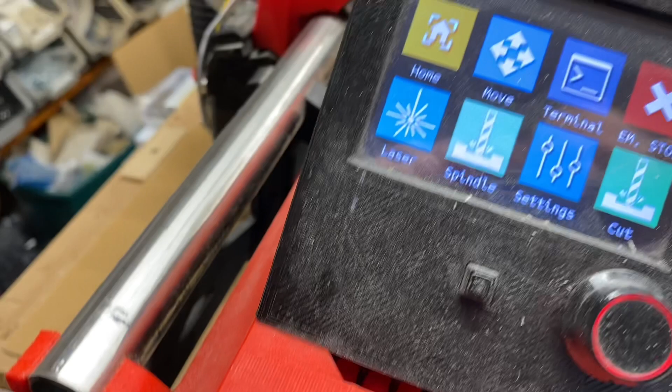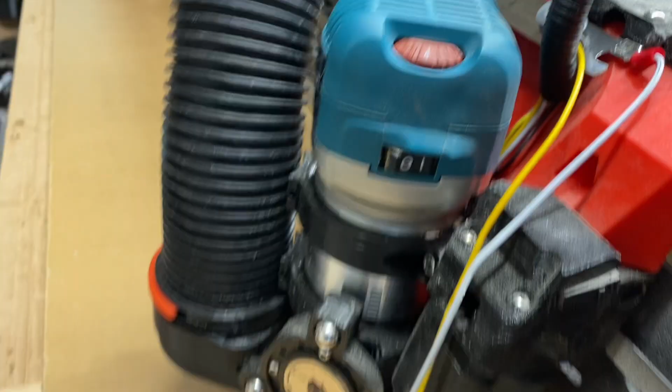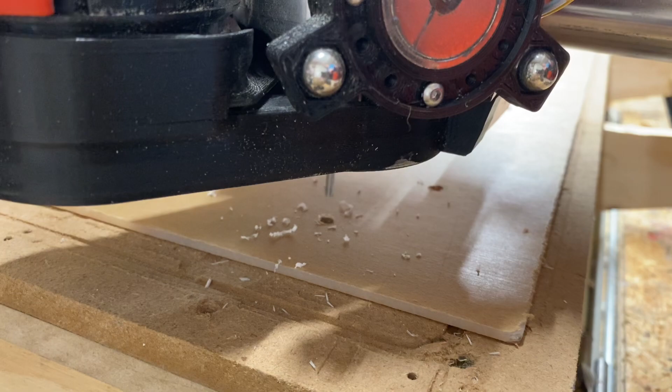I'm a big fan of V1 Engineering and the free open source plans that Ryan makes available for awesome machines, one of which is the mostly printed CNC and also its big brother derivative, the LowRider, currently in its third version. I've built two of the LowRiders, actually I built a version 2, then upgraded it to a version 3, and then built another version 3.

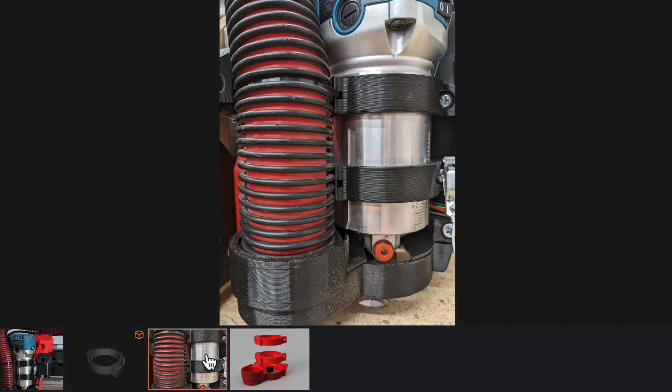Ryan has an excellent design combo for the LowRider version 3 that is a router mount for the Makita 700 series router plus a dust shoe. That dust shoe works great for dust collection, except when your LowRider is riding high above the material where the gap is too great for successful dust collection.

And since cutting and pocketing deeply on thick materials requires a longer bit, and that cut usually has to start with the tip of that longer bit barely into the material, it means that for at least part of the cut job, the LowRider is going to be riding high, and at that point it's going to be spreading sawdust or chips. It's been a desire of LowRider makers to have a way for the dust shoe to stay close to the material for the whole job.

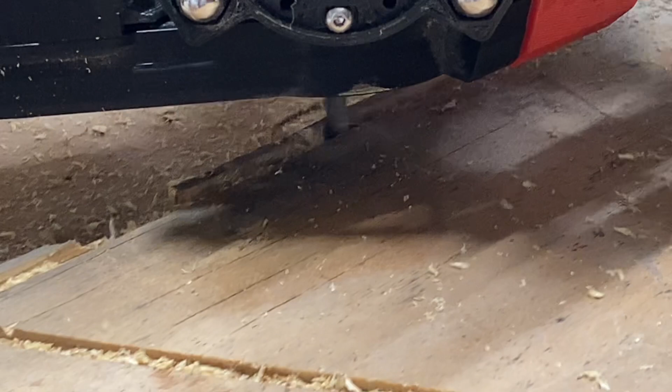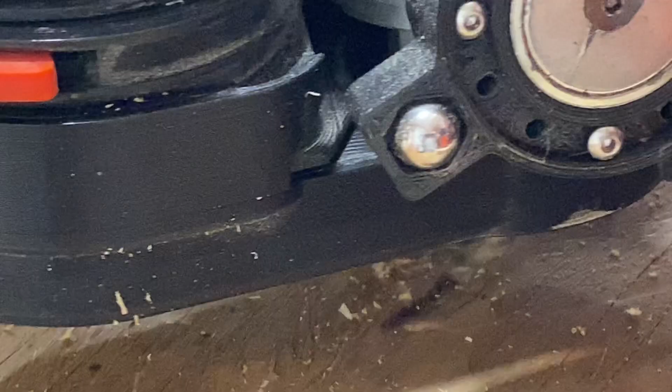Now, part of the strength of the LowRider design is that the closer it gets to the material, the more rigid and stronger the CNC machine is. This is the exact opposite of how most CNCs work. And it's one reason why it's been worth it to put up with any issues in dust collection, because of that added rigidity as you get closer to the material.

But this is accomplished by having the whole X gantry rise and fall in the Z-axis on a LowRider, not just the router itself or the core rising and descending, but the whole X gantry. And so most dust shoe approaches of the CNC world are non-starters. Most CNC designs have a gantry that doesn't travel up and down in the Z-axis. And so this has been discussed at length on the V1 Engineering Forum.

One workaround has been to remix and print slide-on shoes, dust shoes that have higher height. They're thicker, they get closer down to the material, and then pause the job and swap out the tall dust shoe for a shorter one as the core moves down closer to get deeper into the cuts. This means that every time you want to swap a taller dust shoe for a shorter one, you have to temporarily pause the job, turn off the router, then swap the dust shoe, then turn the router back on, then start the job again. So it's doable, it's not real convenient, and so it's less than ideal.

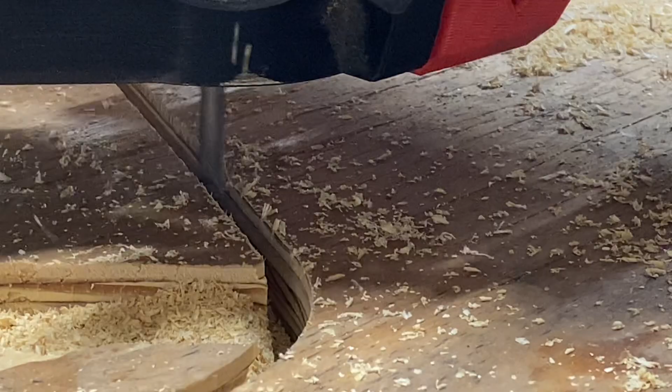So there are at least two basic approaches to tackling this. One is to create a secondary gantry that's attached to the LowRider's YZ plates on either side, and this secondary gantry does not rise in the Z-axis. And then attach to that secondary gantry a height adjustable dust collection system, which can be set and stay at the same Z height for the whole job.

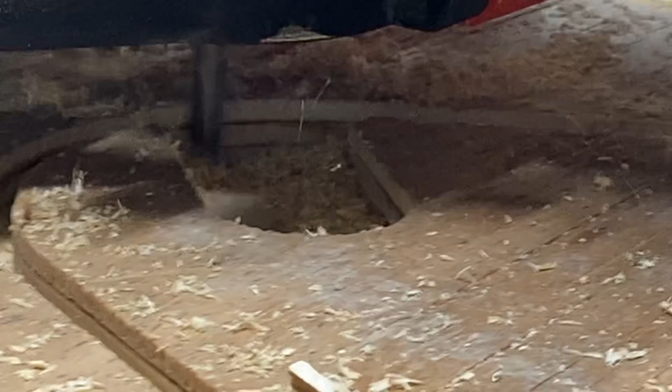There's an engineering challenge here in that this dust collection rig needs to stay in sync with the LowRider core in the X-axis as it moves back and forth, but not in the Z-axis as the core and the gantry itself move up and down. Now, there's an ongoing effort of that approach by Chris, who goes by Fodder1 on the V1 Engineering Forum. His effort is currently underway, and he's kind of tackling one direction while I'm tackling the other.

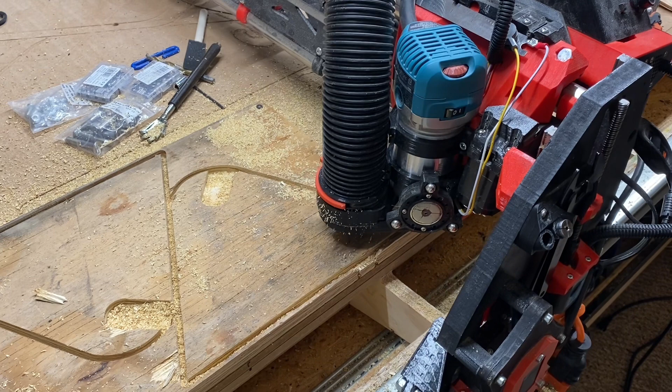The other option is to create a floating Z approach that attaches to the existing LowRider 3 core, and it can adjust on the fly as needed to stay close to the material. The basic idea here is that you would unleash it from some type of a restraint or latch system, and when you're ready to start the job and you've already got everything zeroed in, you would unlatch it and let it drop down onto the top of the material.

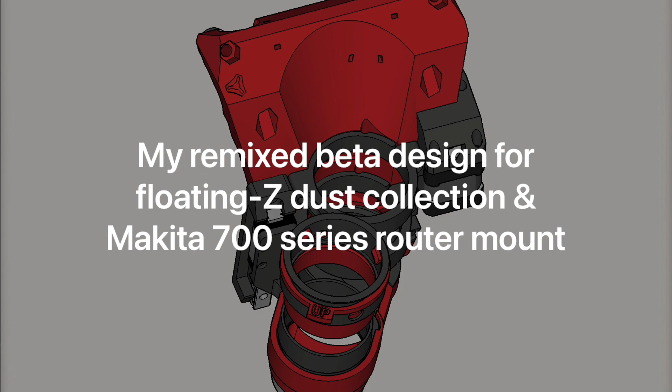It would have brush bristles of some type. My first effort is going to try with bristles made of EVA craft foam. And if that doesn't work out, then I'll switch to some printed TPU brush bristles.

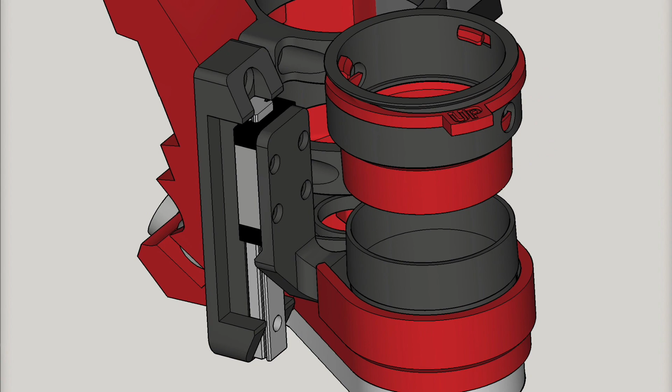But in my efforts to tackle this other approach, I have made a beta test version of my design available on my printables.com account, and I'll put a link in the description for that. This is definitely a work in progress as of the posting of this video.

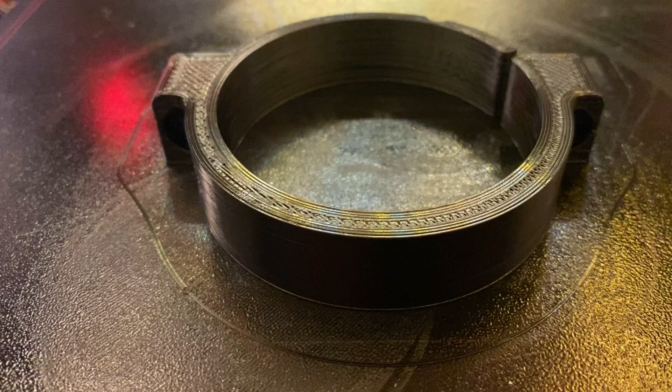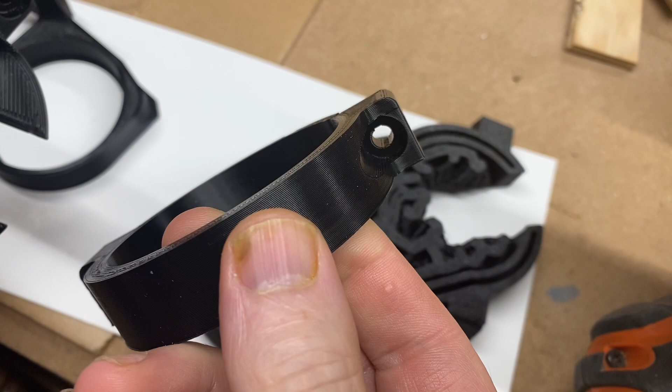Currently, I've printed all the parts. I'm using PLA for printing all of those parts. And I'm already in possession of some craft foam. It comes in 12-inch by 18-inch sheets, about 2.3 or 2.4 millimeters thick. And I used my CO2 laser to cut out bristles out of that craft foam, and so far they're working really good.

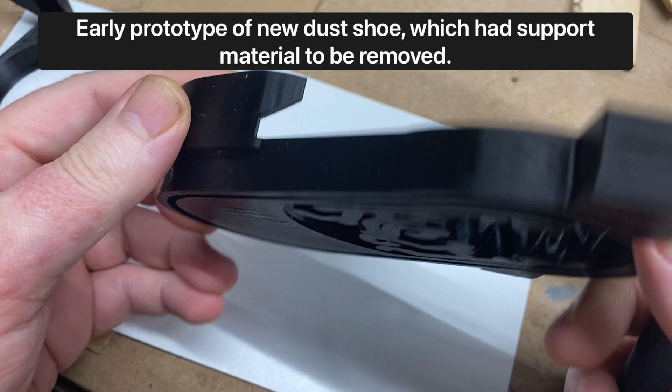I'm also waiting on the arrival of a couple of recently ordered items that I'll need: some 2.5-inch flex hose, I'm only going to need 115 millimeters of that for this project, and some 2.5-inch key hose clamps.

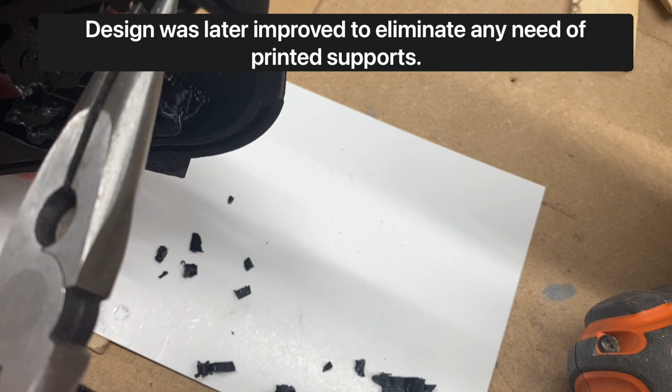I'll need 2 of them to attach that 115 millimeter flex hose between the upper part of this floating Z system and the lower part that moves up and down. The concept here is actually the reverse of that. The flex hose will go at the bottom to the dust collection system that is kind of sledding or skating on the material and not changing its Z height.

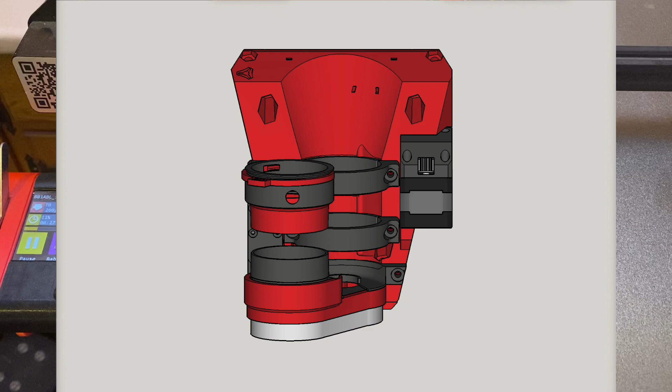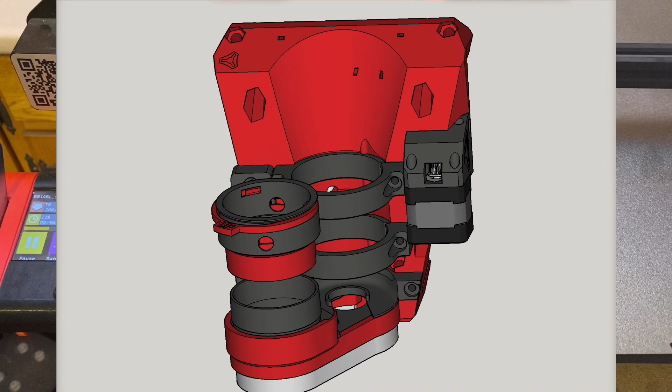The top of that bit of flex hose will be attached to the LowRider core, and as the LowRider core lowers or rises, the flex hose would be able to compress or expand as needed to keep the suction across that changing distance. So if you are a V1 engineering maker, a fellow LowRider maker, and you'd like to help test this approach, and you don't mind being a little adventurous and having a potential possible loss of a little bit of wasted PLA, please feel free to print this out and assemble it and try it out.

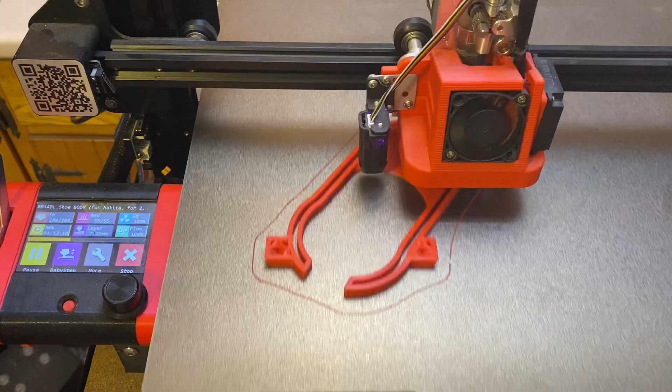Regarding the bristles, there are at least 3 ways to accomplish this. One is the EVA craft foam. I mentioned the printed TPU bristles. And lastly is buying an actual dust shoe brush. You can buy these on Amazon and other places. I've bought some of that, but it's too thick to fit into the groove on the bottom of my dust shoe here, so I'm not going to go with that approach. There's also the possibility of cutting the bristles loose from the brush strip that's too thick and then epoxy gluing loose bristles into the groove. I'm also not interested in doing that kind of approach.

I've already done the laser cutting, and it really came out wonderfully, cutting the craft foam to get the bristles. So if you have some craft foam on hand and it's a large enough sheet and you've got a laser cutter, you're set. You could also just cut a 24 millimeter strip and cut it to the proper length, which I think is somewhere around 317 millimeters to 322 millimeters in length. You can then insert that. My thought is to glue that strip of craft foam in, possibly with some rubber cement, and then you could just use scissors to snip your slits into it to produce your separate bristles.

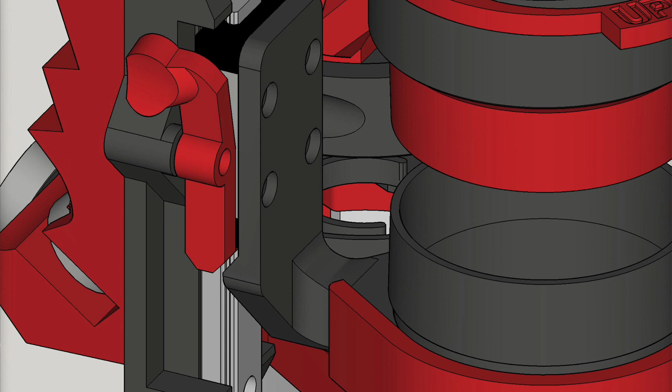The possibility of having to keep up with that separate printed bar with the magnets in it, and the possibility of losing it, caused me to explore other options. One that I came up with, and I don't know if it's going to work, is to have a slide latch. So I worked up a design with an alternate B version, a B option, the linear rail mount that has a little protrusion on the side where a hinge pin can go. My plan is to use an M5 bolt for that hinge pin. Then I designed a latch, and the latch would be spring loaded, using the spring taken from a common writing pen. Again, the illustrations for this make it clear if you want to try that.

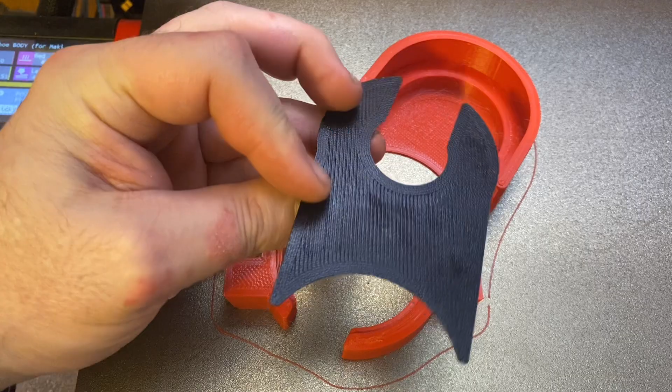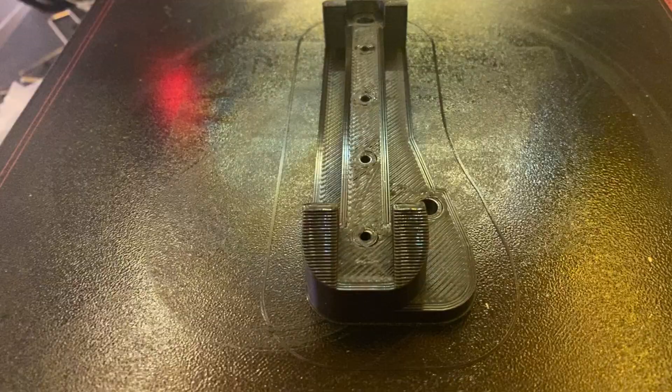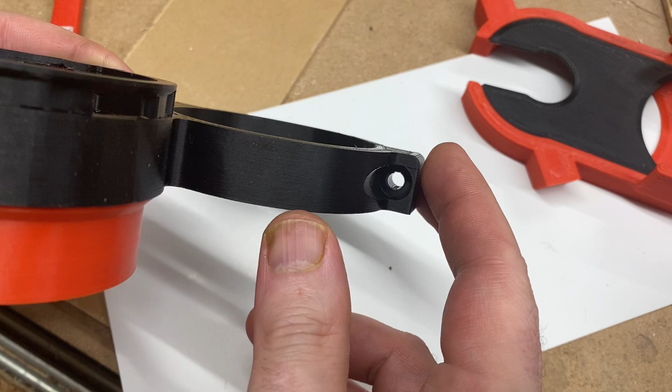I wanted to mention a question that came up on the V1 Engineering Forum: if we succeed with a dust shoe that stays close to the material and has bristles constricting the airflow so suction can pull sawdust and chips out, do we want to change how much constriction there is on the bottom of the dust shoe? Not being fluent in fluid dynamics, I'm not sure which way will be best.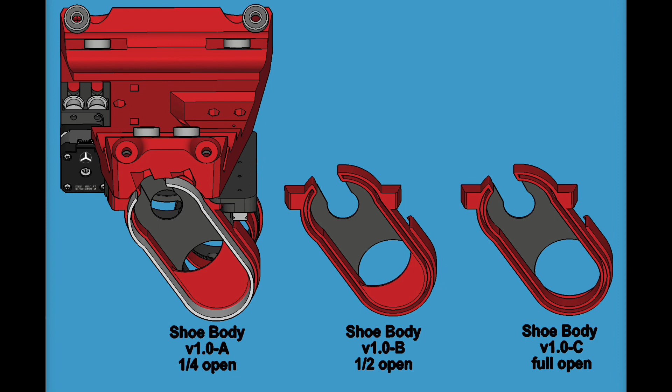So I've mocked up one that's quarter open, one half open, and one full open. I'm going to print all three and test them, then come back with a report on which one works best.

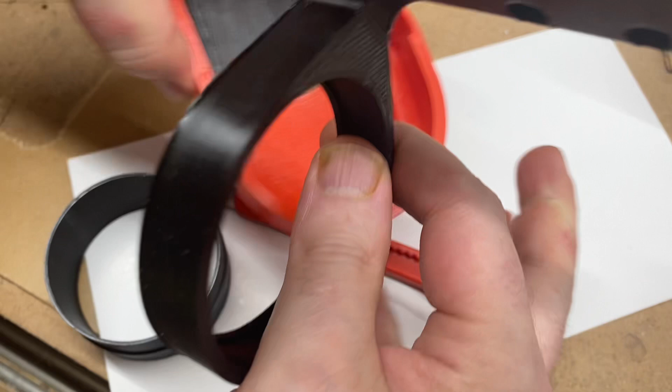I've already got the quarter open one printed, with the EVA craft foam bristles cut for it. I'm just waiting on items I ordered from Amazon to arrive so I can put together a functioning floating Z dust collection system on my LowRider V3.

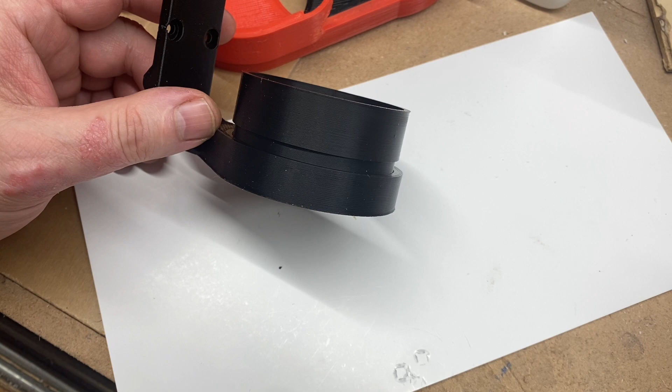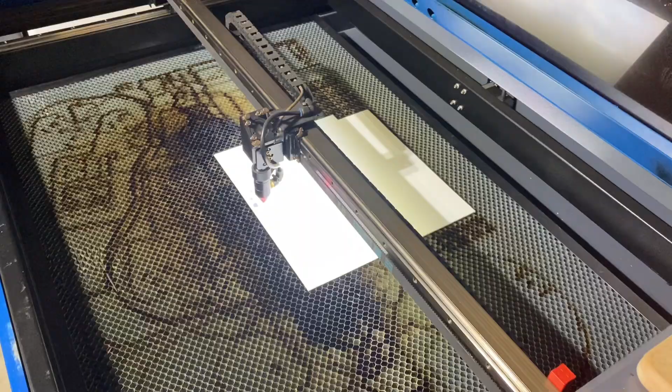Let me show you some video of the actual laser cutting of the foam and the assembly of it, and then that will conclude part one of this adventure. As soon as we have more progress, we'll be back with a continuation.

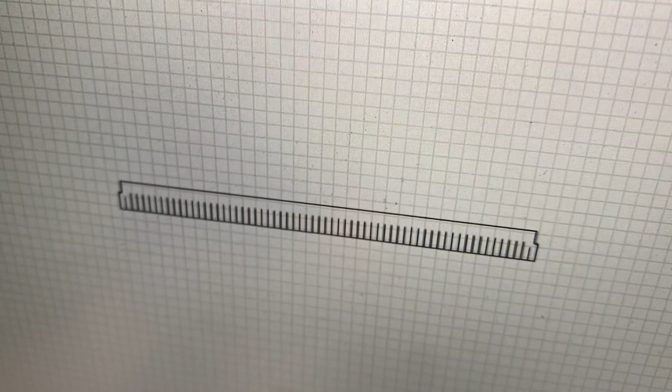I'm about to use LightBurn with my 100 watt CO2 laser to cut EVA craft foam into a shape intended to serve as bristles for a dust shoe for my LowRider DIY CNC. I've never cut this kind of thin EVA craft foam before, but my research indicates you want low power so you're not pumping a lot of heat into the foam.

So I'm trying a speed of 20 with a power of 25, and I'll check to see if it actually cut through, and if not, adjust and rerun the job. I've already used my height checker to make sure my focal length is right between the laser nozzle tip and the foam. So I'll go ahead and frame the job.

All right, the job appears to be positioned properly. So now we will go ahead and start.

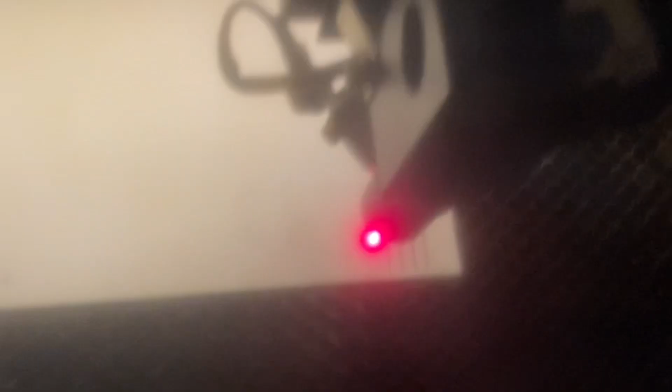From what I can tell so far, it looks like I had my settings about right. I think it's cut completely through, but what I don't understand is why my bristles didn't cut. Okay, there we go, bottom of the bristles are being cut now. It definitely seems to be cutting all the way through. In fact, if anything, I may have put too much power on it, even though I was trying not to. All right, she is done.

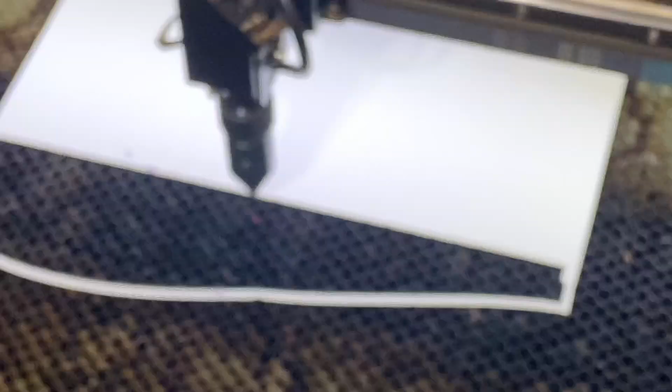Let's see how it came out. I gotta feel good about that. First time cutting EVA craft foam with my laser, and I feel like it came out very good.

Let's go see how it fits in the dust chute. So we just got done cutting our bristles out of EVA craft foam.

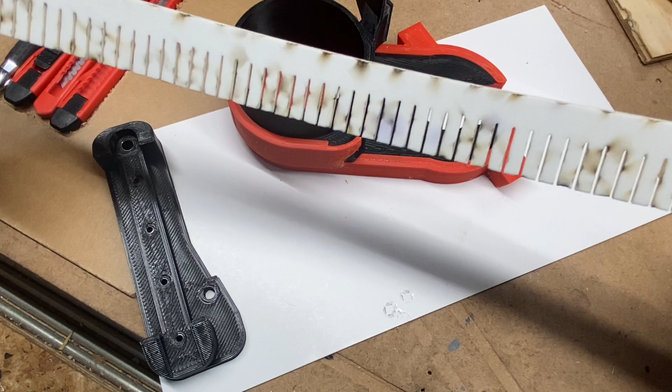I do have a little bit of smoke on this, but that part's going to be facing inside. I've got a little bit of stain on here, probably from some PVC primer. Not sure when that would have dropped onto it, but I'm okay with that. So this is the part, let me snip this out.

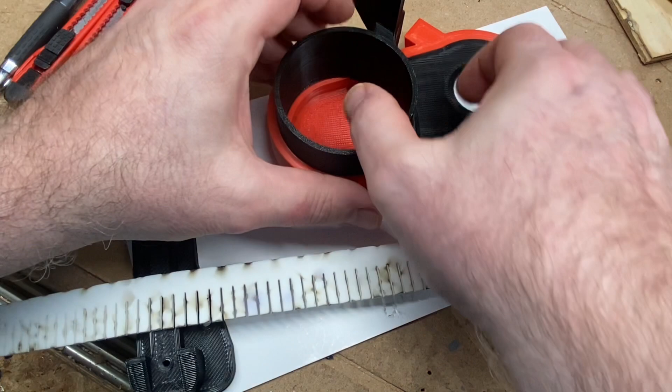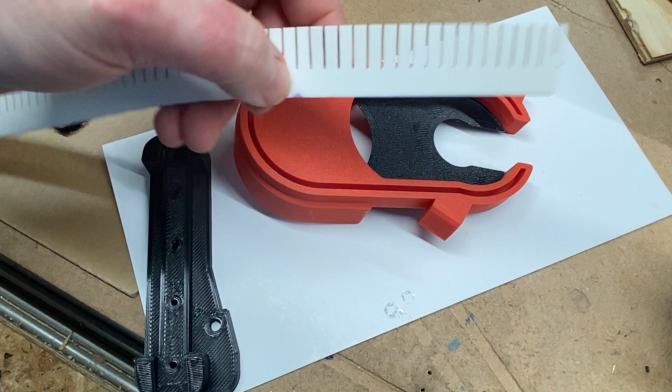This is the part that it fits into, and you'll see the end has a little extension, made to cover this little distance right here.

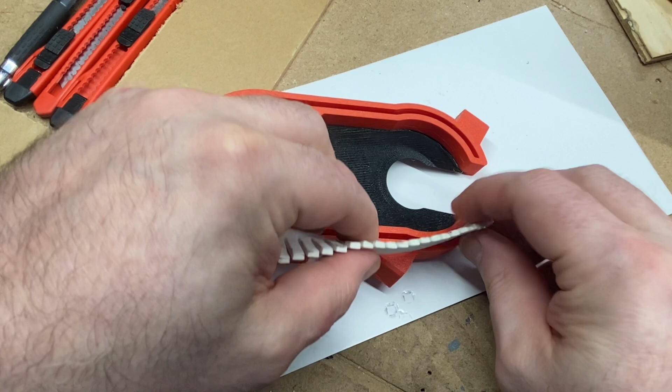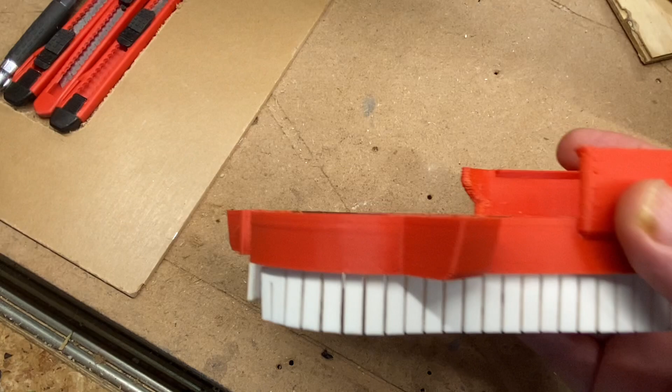I think when I'm finally ready to do this for good, I'll use a little bit of glue, probably some rubber cement, to hold that in place.

You can see those little extensions right there. Looks like I could have afforded to make them slightly longer than I did, or maybe the kerf of the laser took off a little bit, but I'm real happy with that.

So with my floating Z, that would rest on the material. And if it had to get pressed down, it could afford to be compressed. And if it needed to hop over a profile part jutting up, I'd have a little bit of leeway for forgiveness on that.

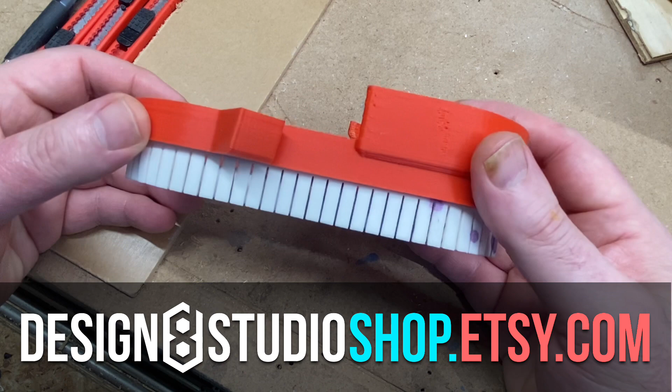So I may cut it again, maybe color matching. I've got a red, I could cut it with a piece of red foam, but I'm real happy with that.